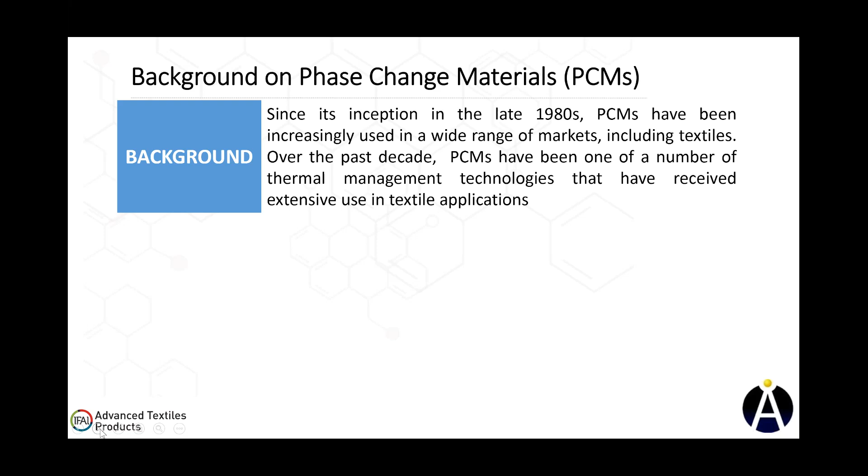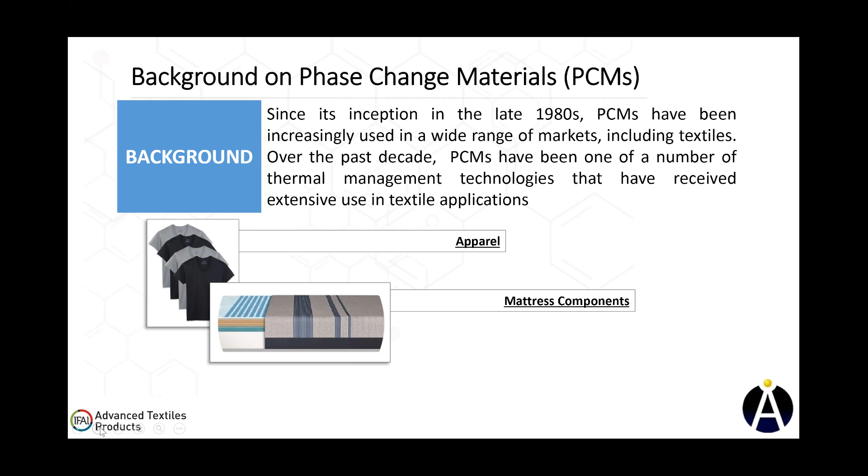Over the past decade, PCMs have been one of a number of different methods people have used for thermal management technologies with textiles, and we'll discuss those in the second section of our webinar. Some of the areas where PCM materials have seen use in textiles obviously is with apparel and mattress components, meaning actually part of the mattress, and then you have top of bed accessories such as pillows and blankets, and increasingly those are an active area for PCM applications.

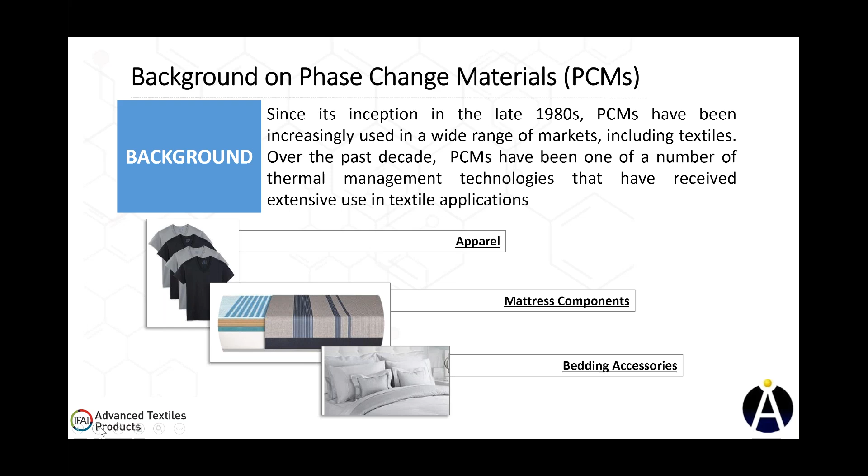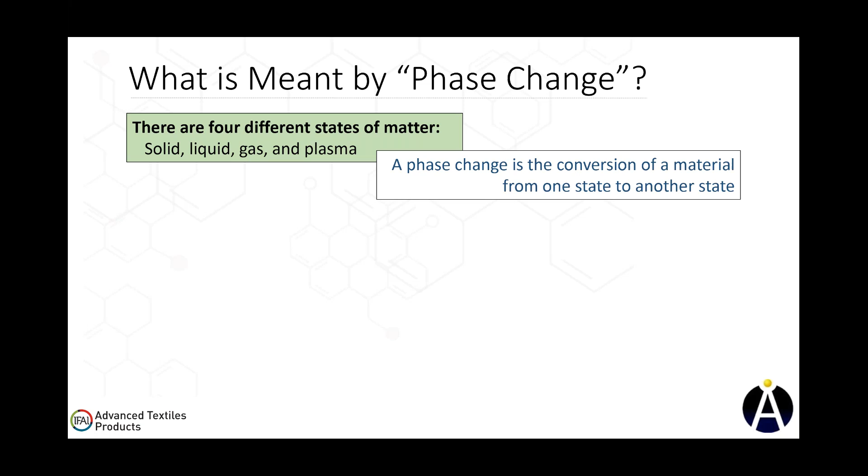Now, first, I think we really have to start with what is the most basic part of this: what is meant by phase change? And unfortunately, we really have to go back to a basic level understanding of materials. That is, when you're talking about matter, obviously we can have solids, liquids, and gases. This is familiar to everyone. Now, when we're talking about a phase change, all we mean is that you're converting the material from one state to another, from a solid to a liquid to a gas. The most obvious place where you have everyday familiarity with this is when we talk about water. We can have water in solid form as ice, all the way up to a gaseous form as steam.

Now, the key point here is that when we're looking at what is driving this transition from one phase to another, as you go from ice to water and water to steam, what's driving that transformation is that you're adding energy into the system. This becomes the basis of any application you would have for a phase change material. And what's important here is the quantity of that energy - it's significant relative to what you would see with other processes, such as when you're just heating up a material. Now, to briefly delve into what is happening, we need to talk about what's happening on a molecular level.

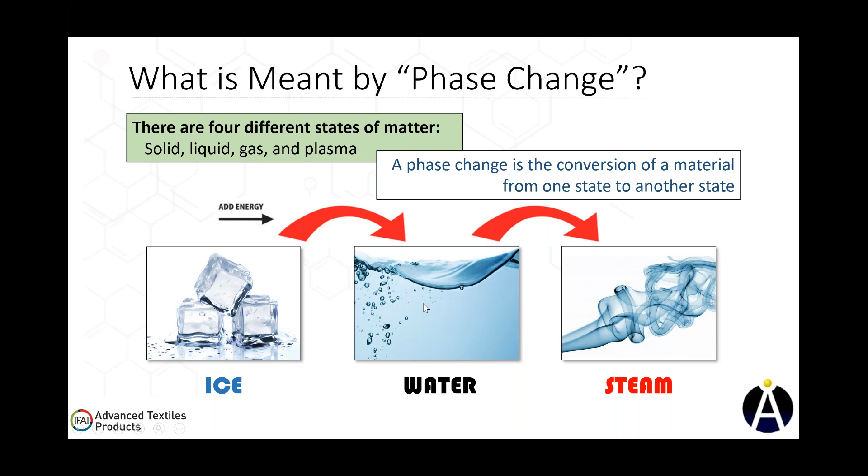So when you have a material that is in a solid form, the molecules within that material are interacting with each other. You have forces that are helping to hold that together. What's happening once you go through a phase change is you're now providing enough energy that it goes from a solid form to liquid form. The molecules or atoms have greater mobility relative to one another, and now it's fluid, and it will adapt to the form of a container and has all the properties we know of as a fluid. Once you add even more energy, that takes it to a gaseous form.

Now, a key point here is that this process is reversible, and that's something that needs to be considered when you're talking about phase change materials. Yes, it does absorb that energy, but also that energy will ultimately get released back into the environment based on the temperature.

Now, this is important to keep in mind when you're talking about a phase change material: what determines when you move from a solid to a liquid or liquid to gas is what temperature you're at. That's what's driving that transformation. Obviously we know this already - ice melts to a liquid at 0 degrees Celsius and water turns to steam at 100 degrees Celsius. The key point to recognize here, and one of three key points you want to keep in mind through this webinar, is that when a material reaches that phase change temperature, energy goes into it, but does not raise the temperature.

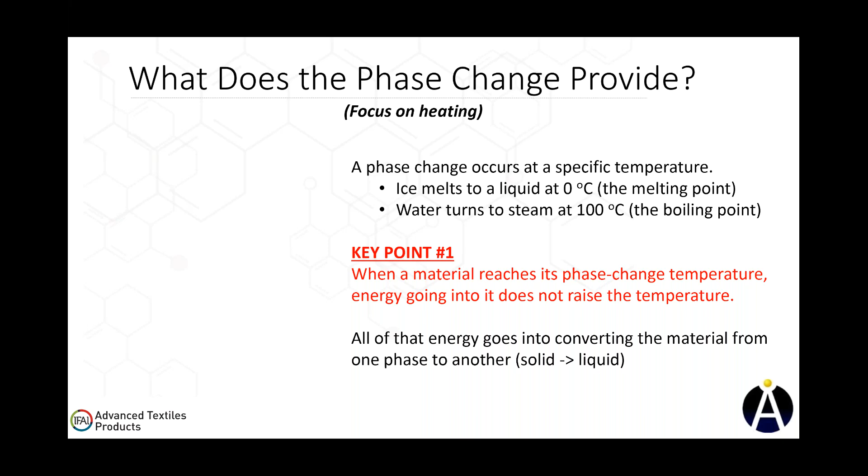This might sound a bit conceptually hard to understand, but from your day-to-day experiences you're very well aware of this, because when you're talking about all the energy that goes from converting a solid to a liquid, this is something you're very familiar with when using ice. So I'll give you a thought experiment that can help you understand what that key point means. If you were to take an ice cube and put it on a pan sitting on a stove that is at 100 degrees C, and the ice is sitting in the middle of the pan, melting and starting to move around - if you were to pick up that ice cube carefully, making sure you don't burn yourself, the ice is still 0 degrees C. It's still ice.

What has happened is the heat from the stove has gone into transforming that ice from a solid state to a liquid state. Yet the ice itself has not increased in temperature. That's the key aspect of what you have when you're working with a phase change material.

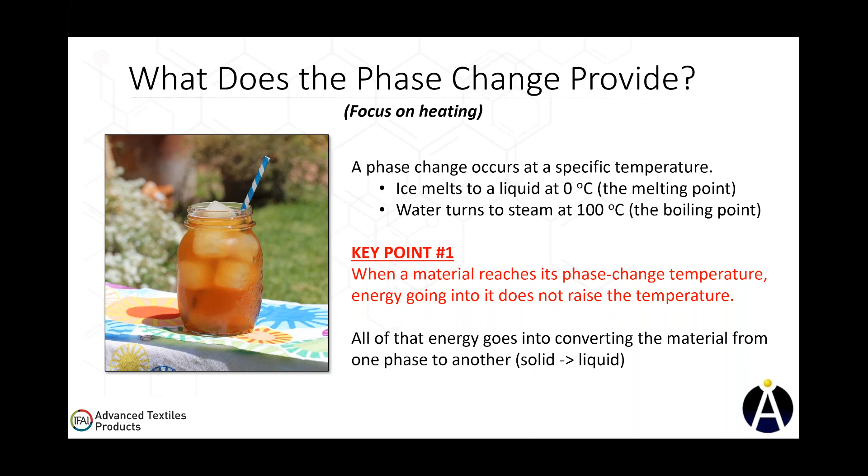Another example is the purpose of putting ice into a drink. When you put ice in a drink, you're helping to keep it cool close to 0 degrees C. As the environment puts energy into your drink, rather than making it hot, the energy goes into the ice and converts it from a solid to a liquid, which helps maintain the temperature of the drink. Any phase change application, it's these type of effects you're looking for.

Now, the next slide, I really want to give you a sense of - and after this we'll begin to focus more on textile applications - but I want you to understand different ways in which selection of the phase change material can impact what type of properties you're going to get.

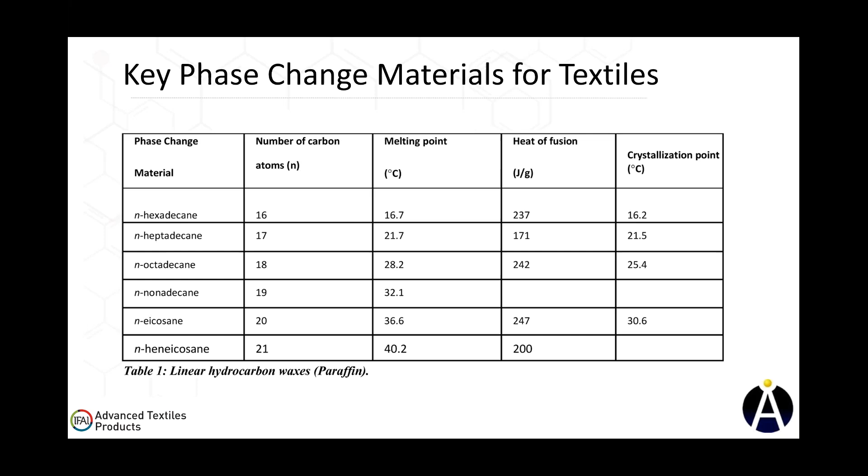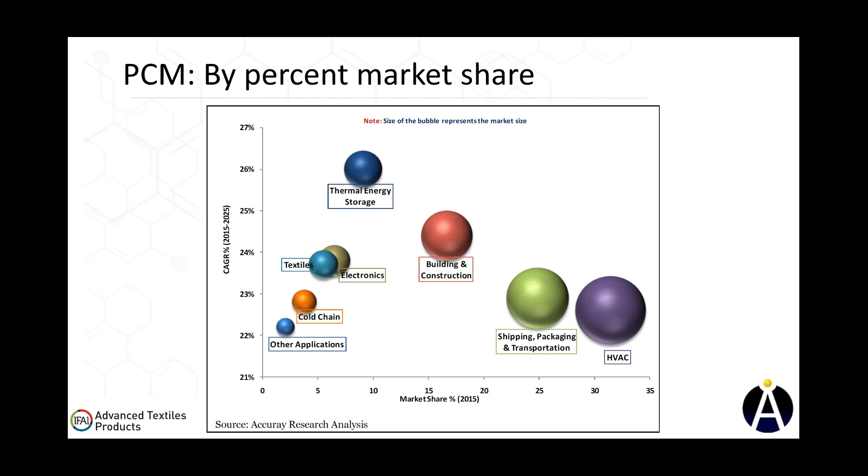Moving to the next slide, I think it's nice to have some perspective on the range of markets phase change materials are used in, not simply textiles. This is from a marketing report. On the x-axis is the market share and percent PCM usage relative to each market, and on the y-axis is the CAGR, showing anticipated growth over the next 10 years. You can see that while PCM is widely used in textiles today, it represents a relatively small share of total markets currently used, primarily HVAC, shipping, and building and construction. But significant growth is anticipated for textiles compared to others.

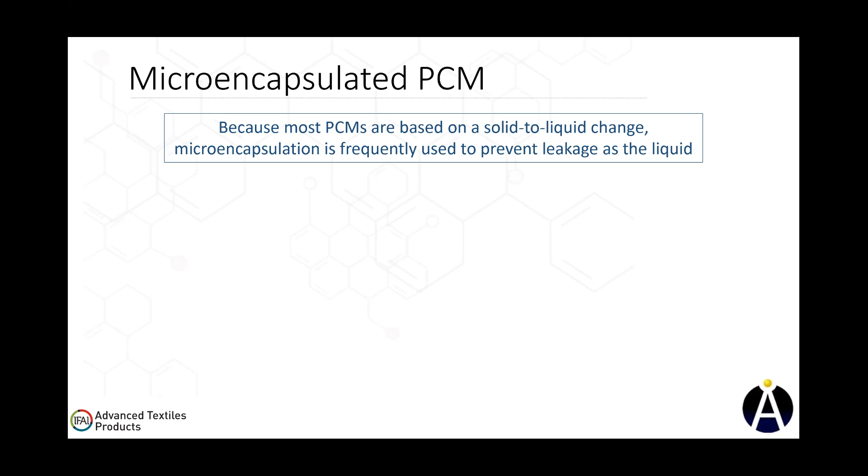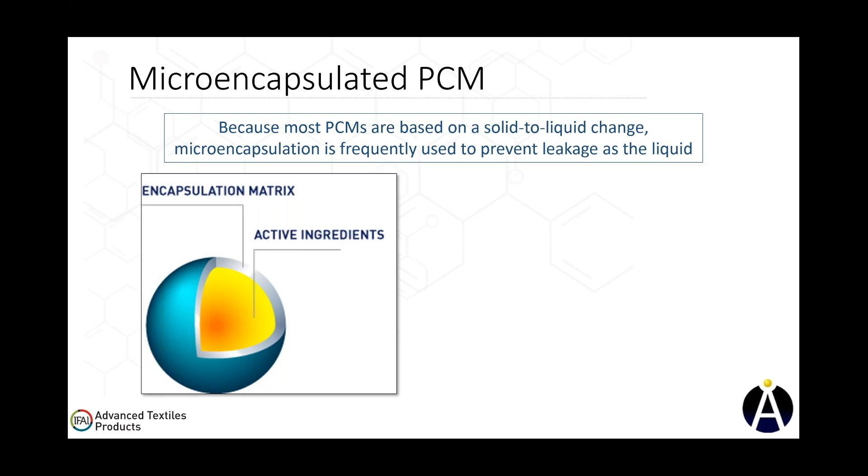Now, one other point for phase change materials, especially for textile applications, is that typically you want to use PCMs in a microencapsulated form. Because most PCMs are based on a solid-to-liquid change, microencapsulation is needed to prevent leakage of the liquid. For those unfamiliar with microencapsulation, it's very similar to a capsule you might have for medicine, where you have an outer shell containing some active ingredient inside. That's exactly what you're doing with a microencapsulated PCM, except, as the word micro implies, it's happening on a much smaller scale.

Now I want to talk about thermal management with textiles, and from here we'll focus on textile applications solely. When looking at the value of thermal management in textiles, there are two basic reasons you'd want to use a PCM or other thermal management technology on a textile. One is simply looking for that cool-to-the-touch effect, as used with mattressing and pillows, where you have that dramatic impact -- we call it the pop of coolness whenever you touch it.

But another important application of PCM and other thermal regulating chemistries is where you're actually trying to control the temperature of the environment. This is what drives building and construction applications -- that's absolutely what they're looking for there. But in textile applications, this is increasingly a focus where you're looking to manage the temperature of, say, the mattress or the apparel when someone's wearing it.

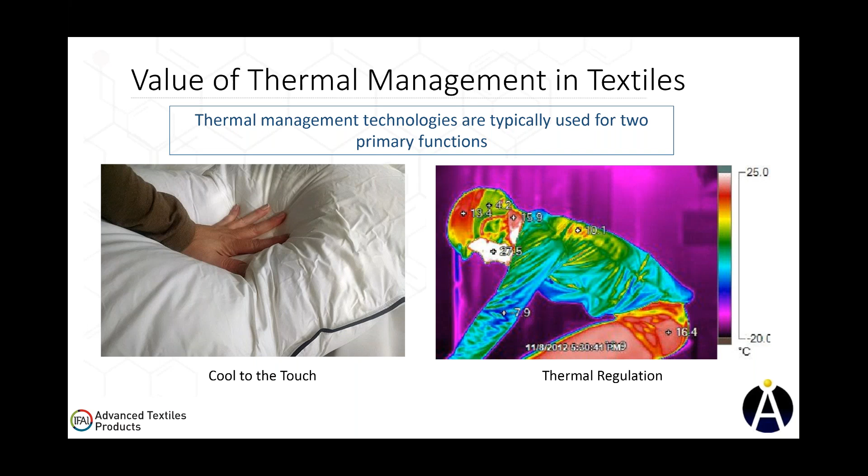So here I have a video which will show you a demonstration of the cool-to-the-touch effect, which is a significant part of the market applications you currently have. In this video, you can see I've taken a competitor's pillow shell, which has been treated with PCM, and on the bottom portion is an Alexium-treated pillow shell.

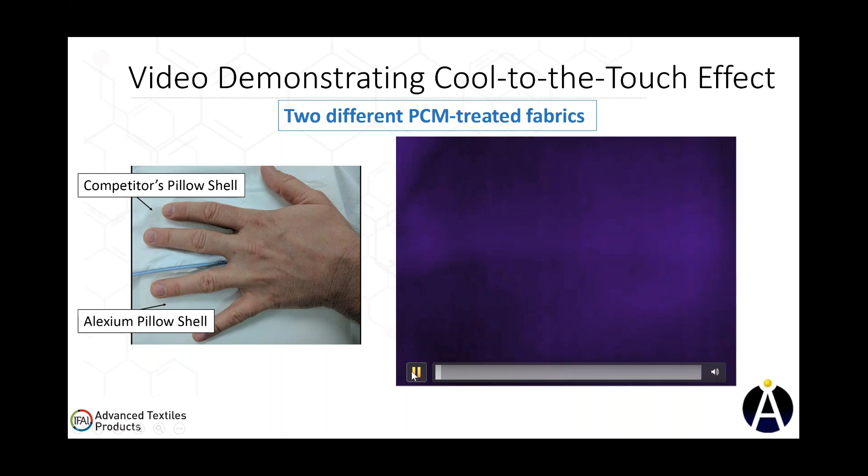You're going to see in this video, to the right, where we're laying our hand across both fabrics and then looking at the temperature response using thermal imagery. I think you'll clearly see that by carefully controlling the amount of PCM you're applying, you can have a dramatic effect on the temperature of the fabrics. For this particular pillow shell, on top, there's actually a relatively low loading of PCM. Toward the end, I'll give you some analytical work we've done looking at these, and you can see how much more this fabric warms up relative to a product Alexium was working on.

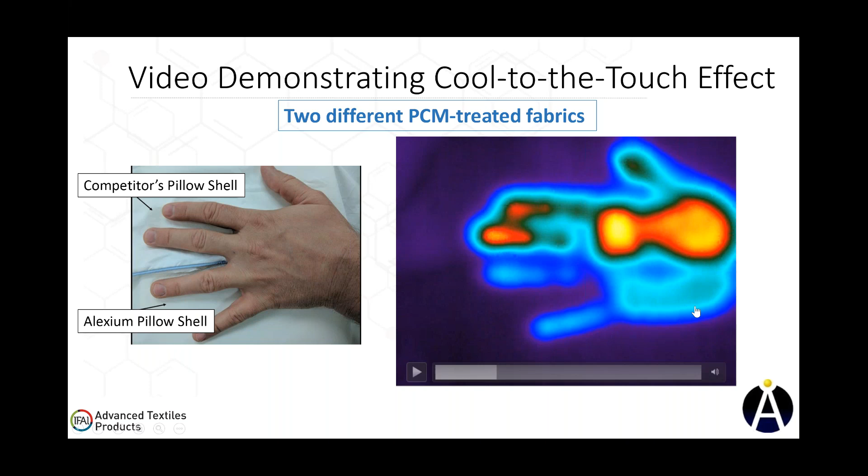Now, something absolutely imperative to consider when working with PCM applications on textiles is that while PCMs will absolutely help with thermal management and that cool-to-the-touch effect, it's actually only one of a number of different properties that contribute. Everything from the air permeability of the fabric, how the fabric is constructed, the fabric weight, thermal effusivity, and moisture wicking -- all of these contribute to the final thermal management effects for the treated fabric. Frankly, you can't look at any one in isolation; you really have to look at how they all work in concert.

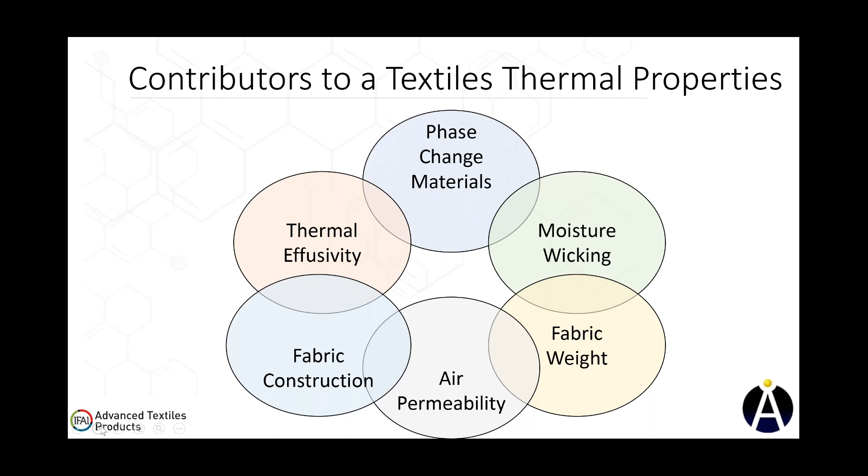Now, to focus briefly on phase change materials and moisture wicking, I think it's important to understand two key properties around both of these when looking at different applications. I typically refer to these as active thermal management chemistries because you have some mechanism driving the cooling of the fabric. For PCM, you could also look at it for heating applications, although we won't discuss that in detail.

When you're looking at phase change material, what's happening is you have, on top of this yellow square, a microencapsulated PCM where the PCM is in a solid state. As the temperature rises, the PCM will absorb that heat, and that absorption results in the PCM going from the solid form to the melted form, and then it is in that liquid state.

Now, what's important to realize is that energy has not gone away. PCM is not going to violate the law of conservation of energy. It still is inside that PCM. As the temperature begins to fall, that heat is going to be released back into the environment. So that's the second key point: PCM absorbs heat, but the heat doesn't disappear, it's simply stored. When thinking about applications of PCM for products you're designing, that's key to keep in mind. Ultimately, the PCM will absorb a certain amount of heat, and then it's reached capacity.

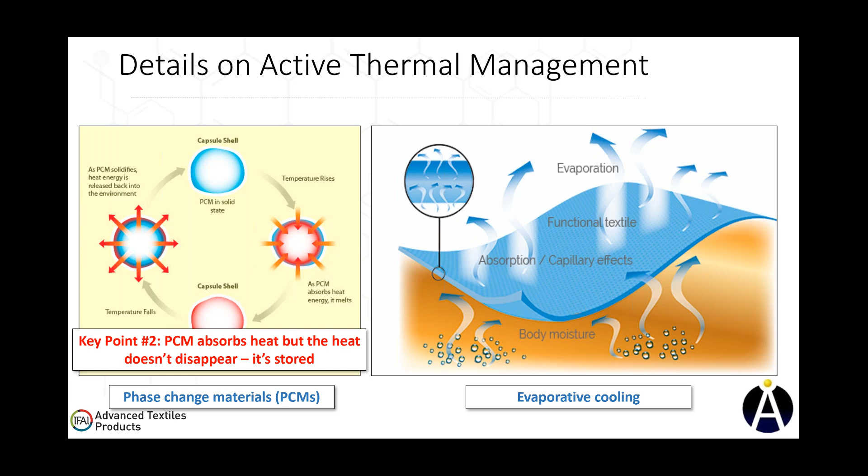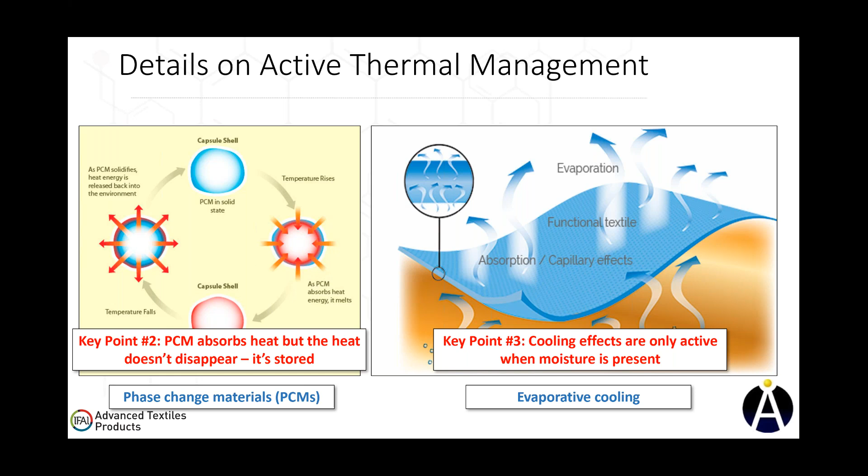An important thing to consider is that these cooling effects are only active when moisture is present. So when talking about sportswear applications, the evaporative cooling through wicking chemistry is a great fit. If you're talking about bedding accessories and things of that nature, it's not as good of an option, simply because the presence of moisture is going to be relatively low.

Now, there are a number of different methods of applying PCM to textiles, and as shown here on the right, basically any standard method you'd anticipate using for textile chemistry is generally available. We've done everything from pad nip, screen print, knife coating, spray applications, and then you have PCM suppliers, particularly Outlast, who work with infusing the PCM into the fibers.

An important thing I want to draw out here is that when you look at two different applications of PCM onto fabric, while in both cases we're applying the same PCM, the overall effect on the textile is very different. On the top, you see a spray application of the PCM, and on the bottom, you see a knife application.

It's basically a give and take here. With the knife application, you get much better coverage of PCM, and the overall cooling capacity you'll have from that application is going to be great. On the flip side, you're going to have lower air permeability, which needs to be taken into consideration for the final overall performance of the fabric. In contrast, the spray application has not as good coverage and a lower overall PCM level, but the air permeability is significantly improved because you're leaving gaps to allow for airflow.

Looking for that balance of those different contributors to thermal management really has to be taken into consideration. This is a great example of the point I was making back on the title slide: if you're not weighing all these factors in balance, you can end up producing a product that ultimately you're not going to be happy with.

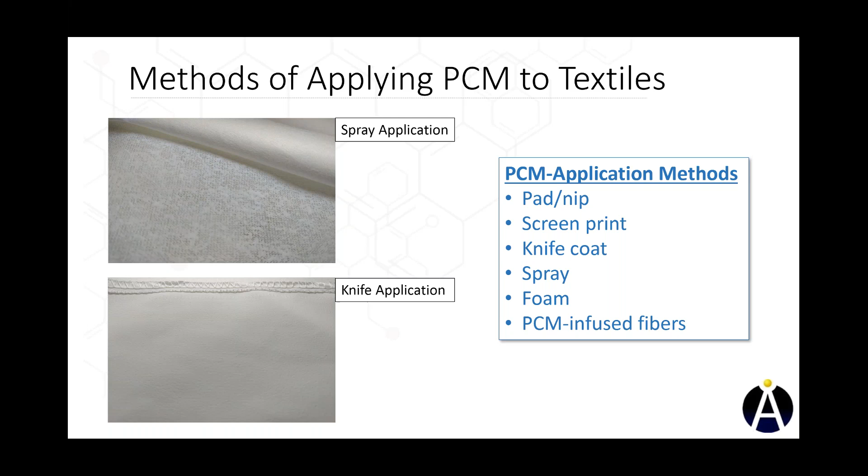Now, the considerations obviously go much beyond thermal management, and there's a lot of different properties that you'll want to take into consideration that I want to touch on briefly.

Obviously, you need to look at the coating effects. We've talked about focusing very much on thermal management, but if you add a PCM application for bedding that ended up giving it a very hard, stiff hand, that obviously is not going to be acceptable. That's something that can be tailored as you go from one application method to another, and also by looking at the secondary chemistries.

Also listed here is transparency. That means transparency of the finish that you're applying. Basically, selection of the best particle size is really what would be needed there to tailor that.

Multifunctionality is something you also want to look at. Flame retardant applications are generally needed, given that you're adding a waxy type material for something like bedding. You'll need a flame retardant that can be incorporated with your PCM to counterbalance whatever additional flammability it may be introducing.

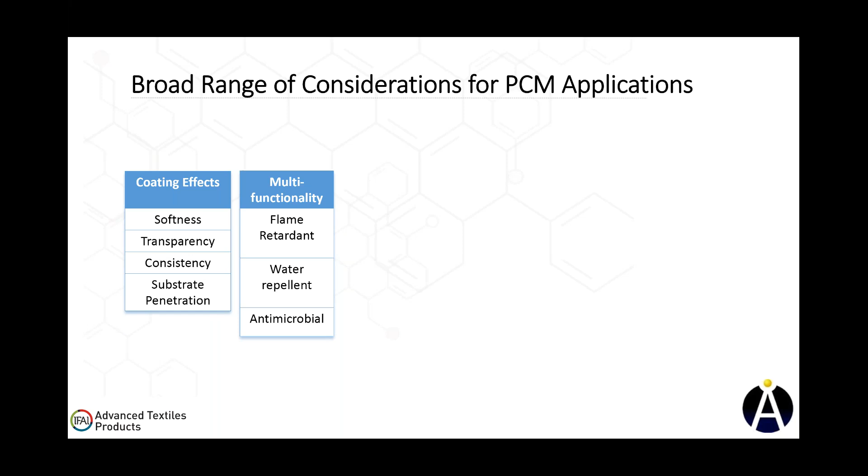You can also add water repellent and antimicrobial properties. Integrating these into a one-step process can be done. That's something Alexium has done a great deal of work on, but it does help to minimize the ultimate cost for a given manufacturer. We've already talked about application methods, so I think we're good there.

A key point that typically comes up toward the end of discussions around PCM applications, unfortunately, is commercial viability. Because while we can focus on what is the best PCM application to get a desired effect, we also need to take into consideration, is the cost reasonable?

Or for a given PCM type or secondary chemistries you're using, do you end up introducing materials that are bad about releasing VOCs or formaldehyde? That's something that definitely has to be taken into consideration, and you want to consider it in early stages as opposed to late stages.

To briefly touch on VOC versus trying to maintain low VOC and low formaldehyde, most of the shell materials that you would use for a PCM are what's going to drive this. The two most common materials are acrylic shells and melamine formaldehyde shells. Typically, the acrylic shells are going to be more apt to release VOCs.

The melamine formaldehyde would obviously release formaldehyde. So it's a bit of a give and take there in terms of what is the best way to go in terms of commercial viability. It's just something that will need to be managed.

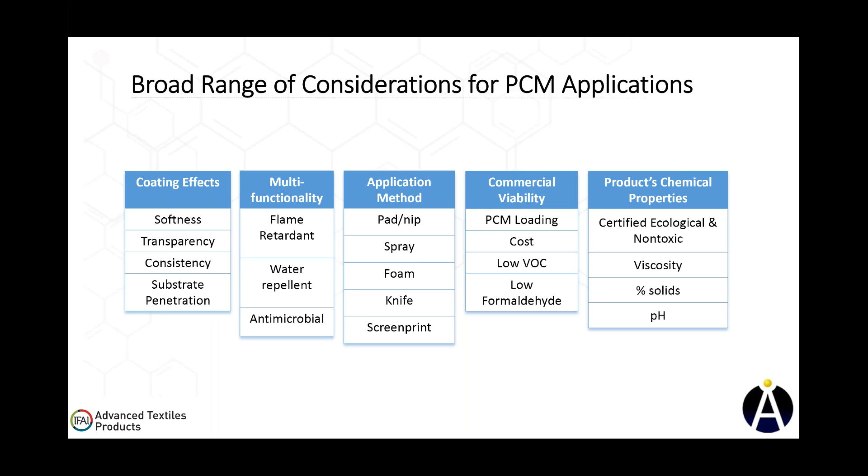Finally, you obviously have the product's chemical properties to make sure that it's acceptable for use, such as getting certification that it's ecotox friendly.

Now what we'll talk about for a bit here is major textile markets where phase change materials are used. We touched on this briefly, but I think it's worth going into a bit more detail regarding the individual needs of these applications. So if we talk first about apparel, sportswear is where thermal management has been most widely used.

But this has predominantly been done with wicking chemistries as opposed to PCM. This is probably a bit obvious given the fact that for sportswear, the moisture that would go onto the fabric as a person begins sweating makes wicking chemistries just an ideal fit for that.

But in terms of integrating PCM applications, it absolutely can have some role there, especially looking at how you can integrate different types of PCM and how those different temperature ranges could be valuable in terms of providing a cooling effect.

Something to keep in mind here that I would like to emphasize is that when you're talking about sportswear in particular, you really have to take into consideration wash durability. And this is a real challenge whether you're dealing with wicking chemistries or with PCM products.

Alexium developed a PCM wicking combination where we applied both types of chemistry in one step. Getting the performance we needed was relatively easy, but attaining the wash durability was not. It was something that did take a great deal of work. Ultimately, we achieved 50 wash cycle launderability.

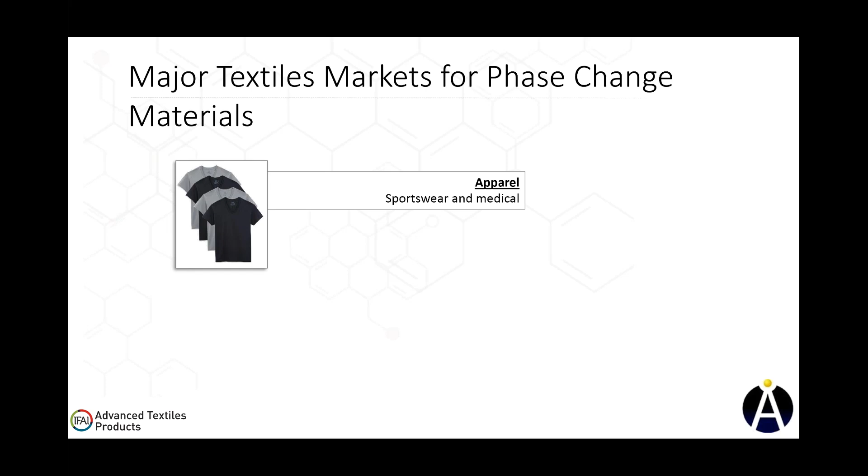Now, one of the more widely used applications is in the mattress industry. Application of PCM to mattress components has driven a great deal of the growth you've seen in this industry, and a great deal of innovation is still going on there.

Given the complexity of mattress design and selection of fabrics as well as selection of PCM materials, there's a great deal of innovation and technical advances that we see are still going to come over the coming years.

Another area of interest is bedding accessories, such as pillows, blankets, sheets, anything considered top of the bed. If you look in the big box stores, this increasingly takes up shelf space, and I think it's going to be a growing market. Right now it's lagging behind what you see in mattressing, but it's definitely going to be a big area of growth over the next 5 years.

You do have to touch on durability, which always has to be considered. Typically, a 5-wash launderability is what would be required there, but for different applications, especially sheets, it could be much greater.

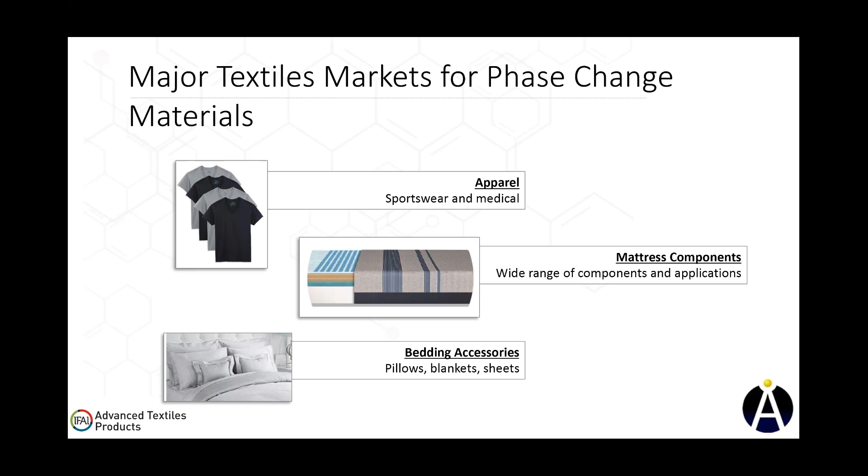Next, I'd like to touch on a review of thermal analytical methods for PCM versus other material properties. The complexity we've dealt with as Alexium has gotten increasingly involved in PCMs for textiles is characterizing the performance of the PCM and really understanding what part of thermal management it's directly contributing, as opposed to what other properties are doing, such as air permeability and fabric weight. That's a very frustrating thing to have to work out.

So in the early days, we reviewed a number of analytical methods to see what the options were. I want to do a brief review of different types of analytical methods that you may have seen either in the literature or used by people in the industry.

We've seen 3 general methods used to study phase change materials. What we're particularly looking at here is not simply whether the PCM has an effect as measured by guarded hot plate, but really trying to look at what effect the PCM is explicitly having, and how we use this method as a means of driving product design.

How does that guide quality control measures? What does that enable you to do in terms of marketing claims? So we're going to dive in here and look at these different methods and basically dissect the advantages and disadvantages of these for looking at PCM applications.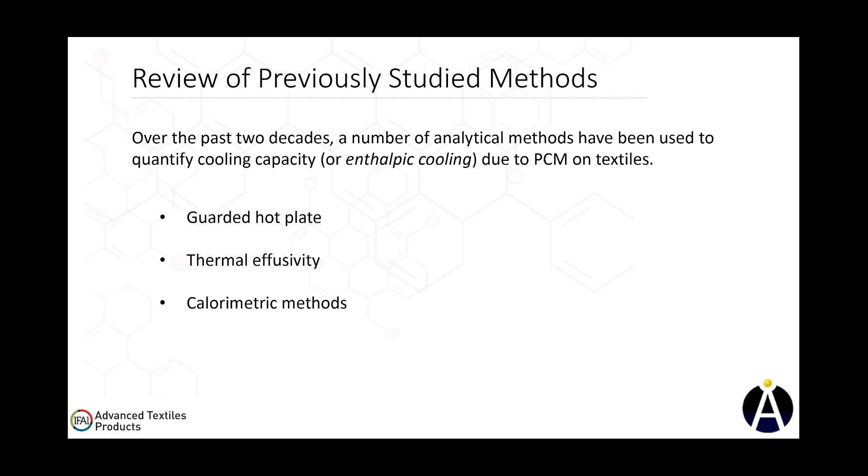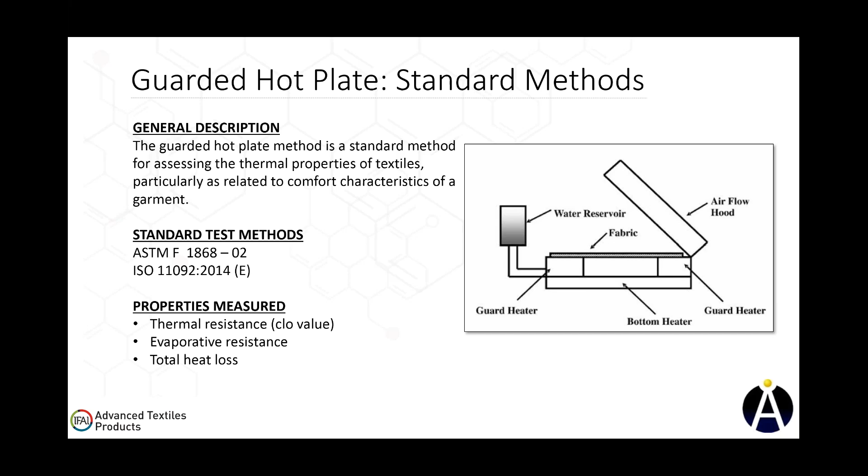Obviously, the guarded hot plate is a standard method used for thermal properties of textiles, particularly as it relates to comfort characteristics of garments. Importantly, the enthalpic cooling or cooling capacity of the PCM is not something you're directly measuring with this method. What you're actually measuring is the Clo value, which is thermal resistance, evaporative resistance, and total heat loss. When you look at the design of the guarded hot plate method and how it's used, there are 2 key aspects that basically guide you in seeing it's really not an ideal method for looking at the effect of the PCM on textile performance.

First, as used by the standard method for guarded hot plate, the heating elements are maintained at 35 degrees C, or could be at a different temperature, but this is a standard temperature. Data collection begins after the fabric or fabric assembly reaches steady state conditions.

The problem here is, while you're waiting for the fabric to reach steady state conditions, the PCM is going to be absorbing that heat. By the time steady state conditions have been reached, you've already exhausted the thermal effects the PCM is going to apply. So as a general rule of thumb, a test method that works under steady state conditions is just not going to work well for phase change materials.

Also, as anyone familiar with testing around the guarded hot plate knows, the measurements are critically influenced by a wide range of factors, including air permeability, fabric weight, and other finishes.

Basically, any material change that you're going to make to that fabric, you're going to see that impacted on the guarded hot plate. So discriminating the effect of one variable versus their collective effect is not really easily done with a guarded hot plate.

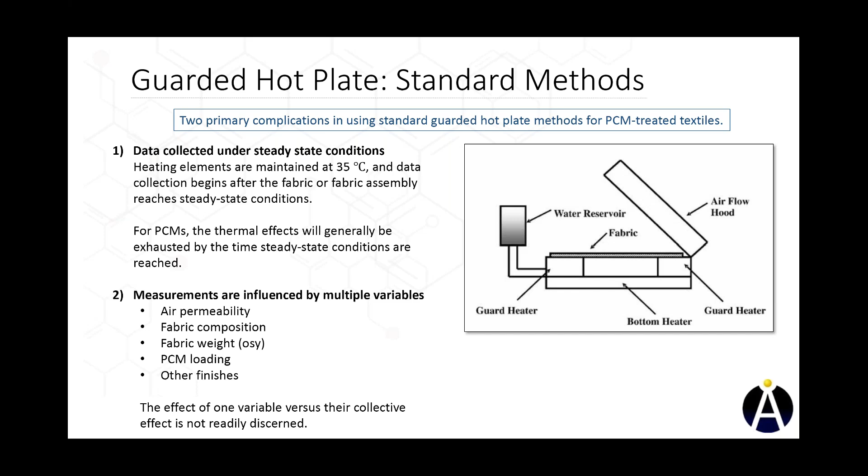Now, there have been some people who have looked at non-standard methods of how you might use a guarded hot plate. This is one study that I pulled from a few years back. In this study, they looked at the effect of the PCM, the effect of the binder. As you can see here, as we're looking at different loadings of PCM versus different loadings of the binder used along with that PCM, you're seeing the same basic effects regardless of which property you're looking at. So guarded hot plate, whether in a standard or non-standard method, has traditionally not been fruitful in terms of looking at the effect of PCM on textiles.

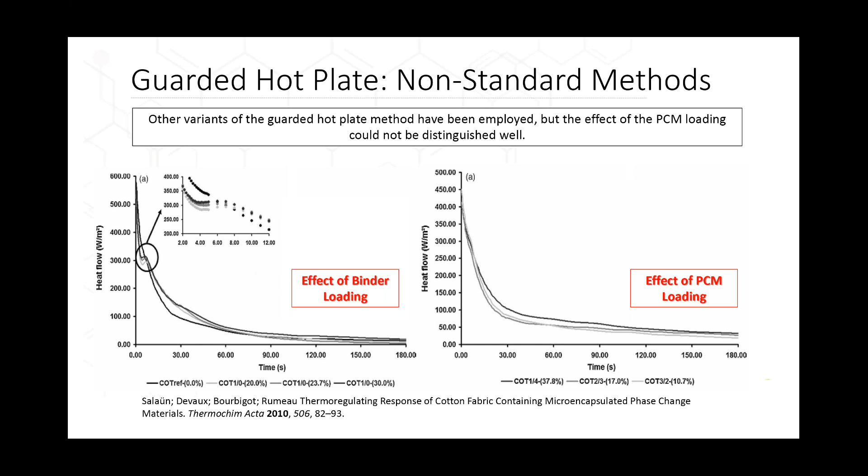Now, another method that has been fairly recently introduced is looking at thermal effusivity as would be measured with the C-therm equipment. This equipment provides a quantitative measurement of thermal effusivity of woven, knitted, non-woven fabrics, and really can be used across a wide range of materials. The best way I would explain the value of the thermal effusivity measurement is not to focus on PCM materials, but actually look at a different type of experiment.

If you were to walk into your kitchen where everything has been sitting there undisturbed that day, and you were to grab a metal spatula versus a plastic spatula, the plastic spatula is going to feel not necessarily cool, just effectively room temperature. On the other hand, a metal spatula will feel very cool. That's because of the high thermal conductivity of the metal. You're getting this cooling effect as it's pulling heat away from your hand. That is not a phase change type process. That's simply a reflection of thermal conductivity and ultimately the thermal effusivity of those products.

So when you're looking at cooling performance around these two different types of materials, C-therm, that's really what it was designed to do.

Now, Alexium did a third-party study where we looked at different fabrics to see what is the impact of a phase change material on the treated fabrics. You can see that on sample A, where we have 17% PCM, the average effusivity that was measured was 165, but this has a significantly higher effusivity than a sample that has 29% PCM, which is sample B.

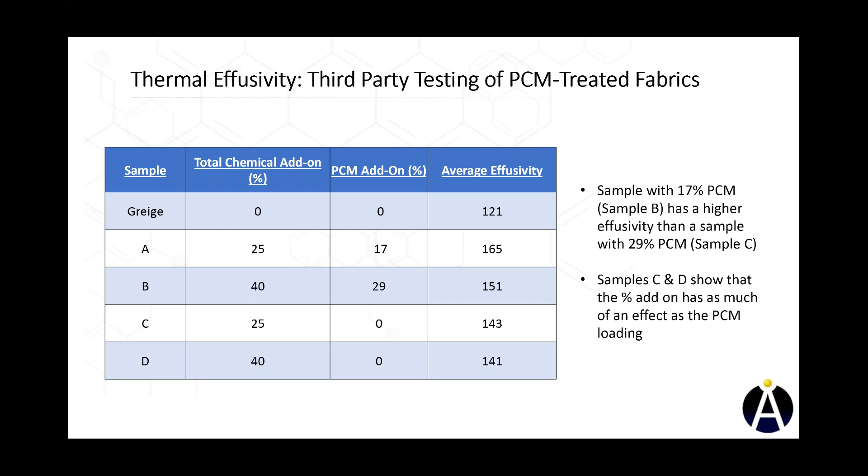Particularly, you see that in the comparison of sample A and B, where even though sample B has a much higher level of PCM chemistry, it still shows up as a lower number. So this is showing you that these other properties are contributing much more so than the PCM in this measurement.

Now, in the past, people have looked at a number of calorimetric methods, and there's a pretty wide range of these. Differential scanning calorimetry, or DSC, is the most commonly used method for this. What you're basically looking at is how much heat is absorbed by a material as you change the temperature over time. Given that that is exactly what you're looking at with a PCM, which is how much heat is being absorbed, this obviously is very well suited for doing this type of measurement. The type of information you can get from this method is melting temperature, and what temperature does it crystallize.

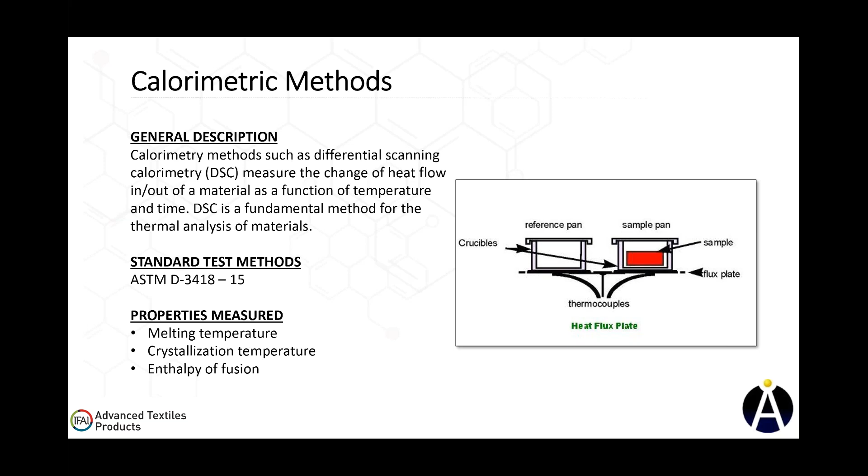Now we looked at a number of different analytical methods, calorimetric methods, to see how they could be used for analyzing PCM on fabric. As you can see in this middle column, I'm comparing how much heat is absorbed relative to how much we would expect to be absorbed theoretically, based on how much PCM is being applied.

You can see here that the variance was absolutely all over the place. We saw cases where no PCM could be detected, to well over 100% being detected. So simply using standard calorimetric methods without being attentive to the fact that you're dealing with a PCM treated fabric, you basically get a random number generator, and it's not of much value.

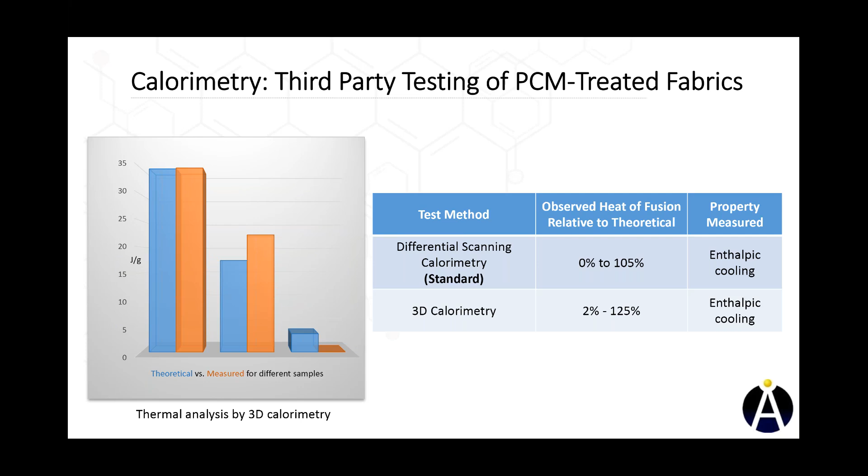Now, what Alexium then saw was that because we could not identify a viable analytical tool to help our customers understand how to use PCM on textiles, we went about developing a method ourselves. What we basically did was take an established DSC method, but identified the core principles that need to be used to provide reliable quantification of the cooling capacity of the PCM treated fabrics.

So what I've touched on here is basically trying to educate on what we found in our research that can help guide people in doing these studies.

First, obviously, we have to start with a temperature that is well outside the melting range of the PCM. You need to make sure that all that PCM is in its active form, so that when you do the test, you can quantify that.

A key thing also is that you have to minimize the amount of air between fibers. I think this is a key problem from the previous data we saw with calorimetry. A basic assumption of doing calorimetry is that you're going to have good heat transfer between your sample and the instrument. If you've got a lot of air, because this is a fluffy textile sample, then you're going to have very poor heat transfer, and that's what ends up giving these low numbers where we're seeing 0% of PCM.

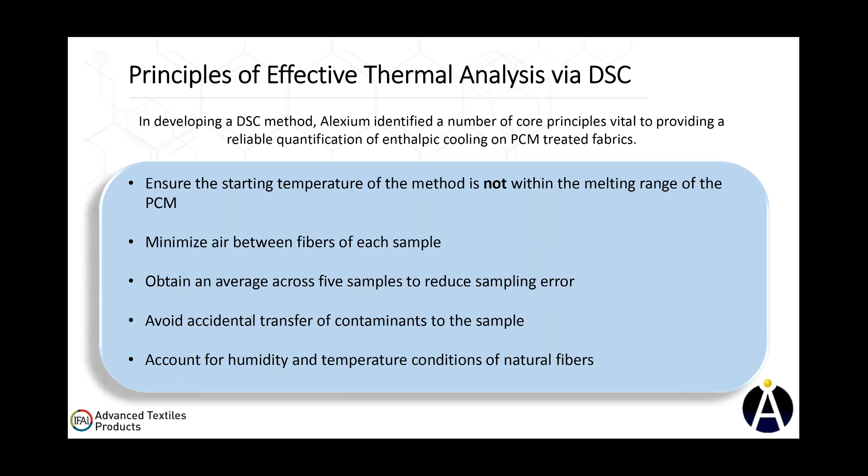You obviously also need to look at a wide range of samples and be careful of contamination, and understand what type of effects humidity and temperature might have.

Now, here is a general description of the test method. Because of what we described previously, this is basically just putting into protocol the principles that I described on the previous slide. The important thing to see here is some basic, I'd say, scanning procedure that we looked at.

You can see that for looking at a PCM that would melt at 28 degrees C, we start very low, at 0 degrees C, and then go well beyond that 28 degree C mark, up to 40 degrees C. This will allow you to make sure you get all the signal associated with the PCM, and also make sure your signal to noise is very good.

Now, on the next slide, this shows you how we were able to measure the relative PCM application as we change the add-on for a given type of fabric. Obviously what we're looking for is a linear response, and as we increase the add-on from as low as about 12.5 to 13% add-on to as high as 38% add-on, you get a nice linear response for this fabric.

For context, it is worth saying this is a polyester-based fabric, and the chemistry was applied through a pad application.

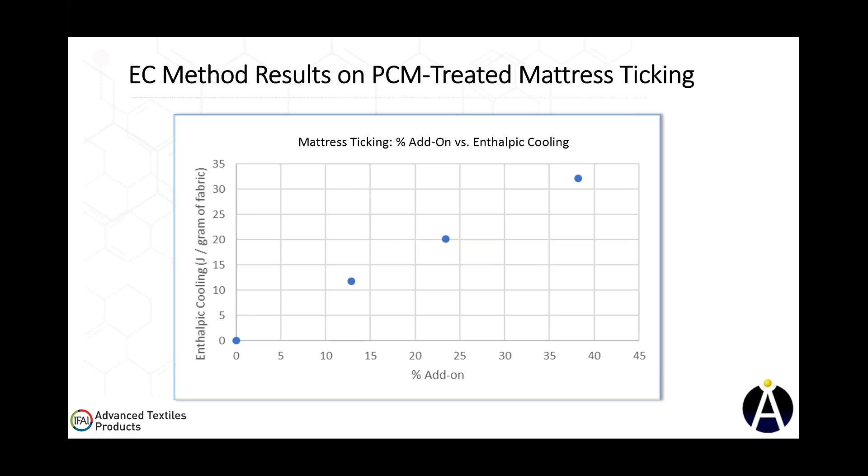Now, what you see on the x-axis is the add-on. If you look on the y-axis, just to touch on this briefly, I'm looking at how much energy is absorbed per mass of fabric. So you're going to need some reference when doing this type of study, whether you're looking at how much heat is absorbed relative to a given area of fabric, or perhaps, as we've done here, mass of fabric.

For all of our tests, that's what we do here. This next slide gives you a sense of what the data looks like coming from the DSC.

Most importantly, look at the two different sample sets we ran here. For sample set 1, we have 5 different samples, with a range of values from 30 to 35 joules per gram of fabric, giving us an average of 33.

We then took the exact same fabric, did different sample preparations, and after averaging those values, we get to 32.1. So the resolution that this method provides is very good.

As a point of reference, I would say that anything in the range of 0 to 5 joules per gram, I don't think you can readily detect that with your hand.

There are going to be subtleties to it, and it's just not something you could readily distinguish by feeling it.

So there's a lot of value in having this analytical method to help understand, in a quality control sense, that you're well within the level of what your consumer could detect.

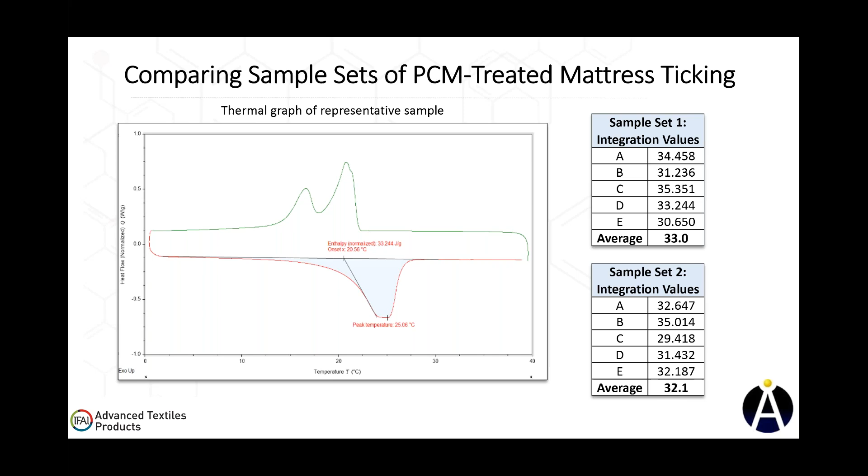Typically, once you get from 5 to 10 joules per gram of fabric, that's when you begin to significantly see a difference. Anything greater than 10 joules per gram would just be grossly different, and anyone could discriminate that.

As a point of reference, we also looked at some different fabrics so you can see the effect of that. Here on the left is a more standard woven polyester, applied through a pad application.

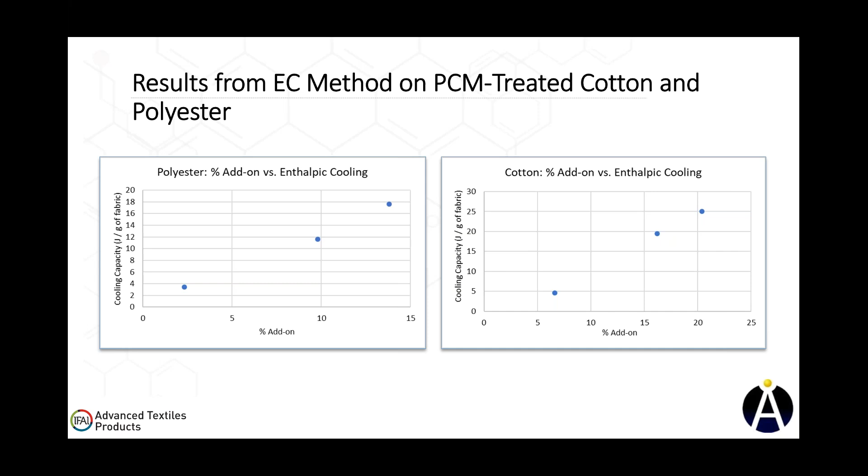You can see we get a linear response there. We also have the effect of what we're measuring here for the cotton.

This next slide shows a back-coated application, where these were all applied through a knife coat.

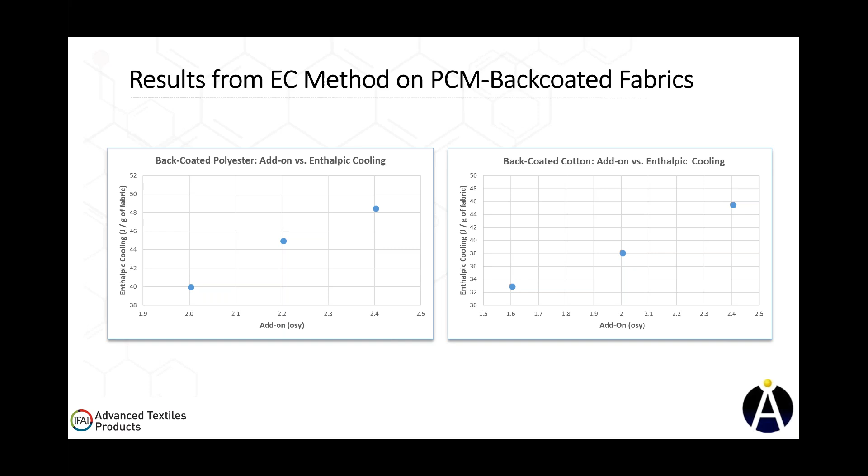You can see it doesn't depend on using a pad application—any type of application method, you can still use this technique to show how, as you increase the add-on, you're going to get a linear response for the amount of PCM.

So the key thing to realize here is that this test method does allow you to discriminate exactly what the PCM is doing. And I'm sure a question someone may have asked or at least thought of is...

Whether you're looking at the EC method that Alexium has developed or looking at the guarded hot plate, they both are different perspectives on exactly what that fabric is doing, and both need to be taken into consideration—really thinking about final product design.

Now on this last slide, I've shown an analysis we did for one of our customers, where we have the Alexium-treated pillows and compared them to 5 different retail pillows.

Looking at the relative cooling capacity of our pillows versus what is out there on the market, importantly, the y-axis here is joules per meter squared—looking at how much heat is absorbed per unit area for the pillow.

Given the different types of construction of these pillows, it seemed the best way to normalize these to have a common reference.

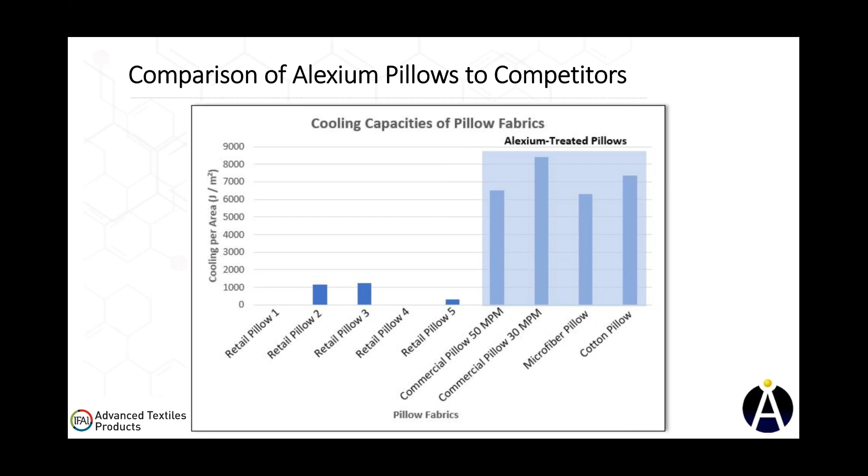So in conclusion, we discussed how PCMs provide an effective means of minimizing how heat flow changes the temperature of the material, and how that impacts the cooling effect that you have.

Over the past 10 years, PCM applications on textiles have grown significantly in a number of markets. This has largely been driven by work in the bedding industry. Given the unique properties of phase change materials, I think we're really only seeing the first steps in terms of different types of applications and what markets they could benefit.

We then looked at what analytical methods were established to measure the enthalpic cooling of the PCM, and found that the established methods really were not reliable at differentiating the effect of the PCM. That's really due to other attributes of the fabric which change as a function of adding the additional binder, simply having shrinkage of the fabric through the application process. All this comes to bear with standard thermal management methods.

Finally, we talked about the EC method that Alexium has developed, which we used as a tool to guide quality control, marketing, and product design when using PCM materials on textiles. We see this as an invaluable tool, and it's been critical for all the work we have going forward.